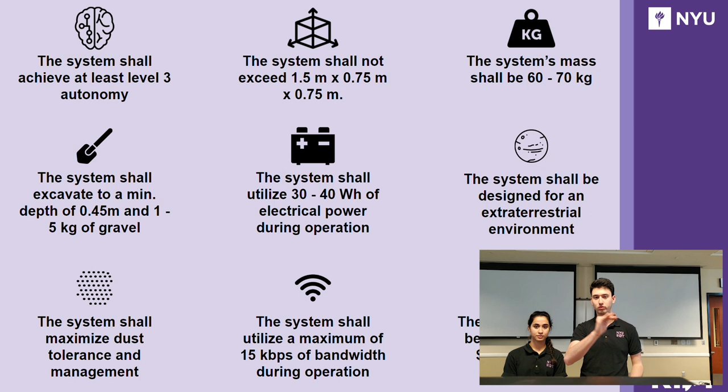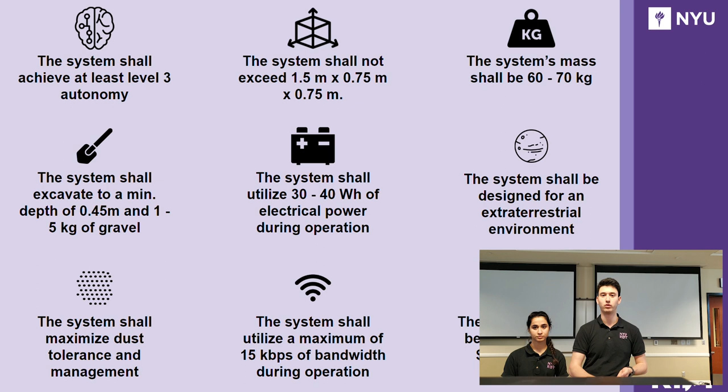We have multiple tiers of performance goals, both for the system and subsystems and individual components, but these are the main 9 performance goals from which the rest were derived. They include achieving at least level 3 autonomy, maintaining within the competition parameters and constraints, utilizing minimal electrical power between 30 and 40 watt hours, minimizing mass between 60 and 70 kilograms, excavating between 1 to 5 kilograms of gravel, and reaching the desired depth to actually get the gravel from beneath the regolith.

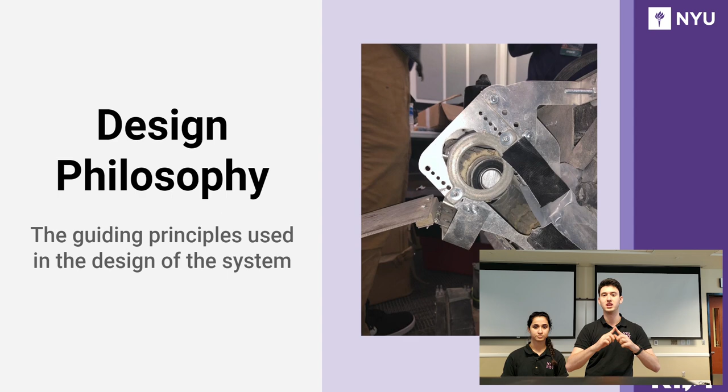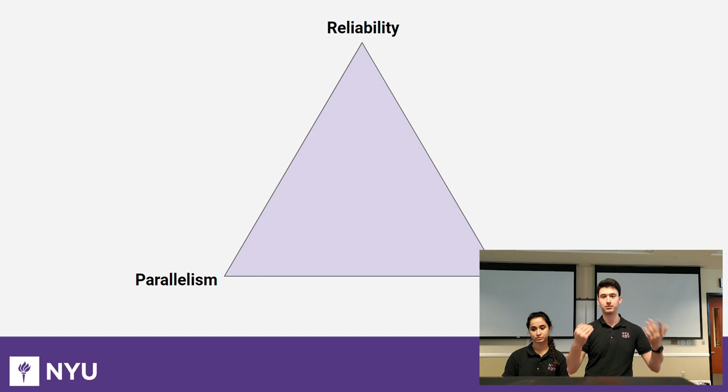Given that horrible event, we created these 3 design principles from which to guide our ideation process. Number 1 is reliability, and supporting that is minimalism and parallelism. So reliability, what does it mean? Well, you don't have AAA on Mars, so the rover needs to operate and operate well.

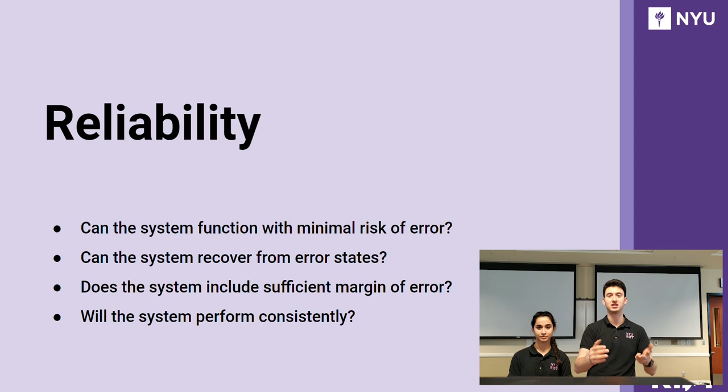It cannot, or should minimize, the amount of error that it sustains. And if it does encounter a fault condition, how can it recover out of it? That involves building the system with a sufficient margin of error, as well as creating a concept of operations that includes these error recovery states and transitions.

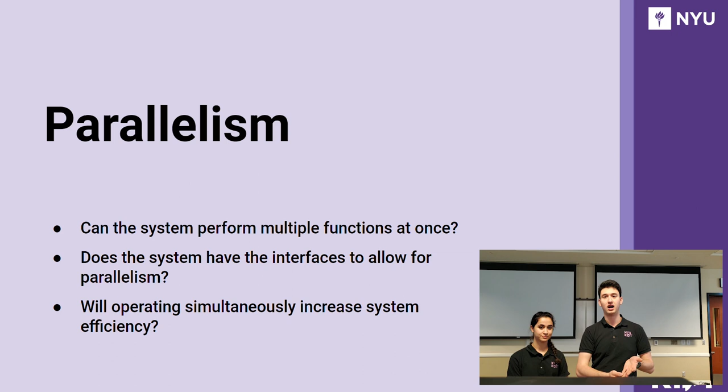Next is parallelism. A lot of time is wasted transitioning between states - digging to deposition, locomotion to digging, etc. So how can we make the system more efficient? We'll have multiple functions occur simultaneously. That's the idea of parallelism. We thought that was really important as a good way to maximize the little time we have, the 10 minutes we have to dig, to be able to get as many runs back and forth as possible and collect as much as possible.

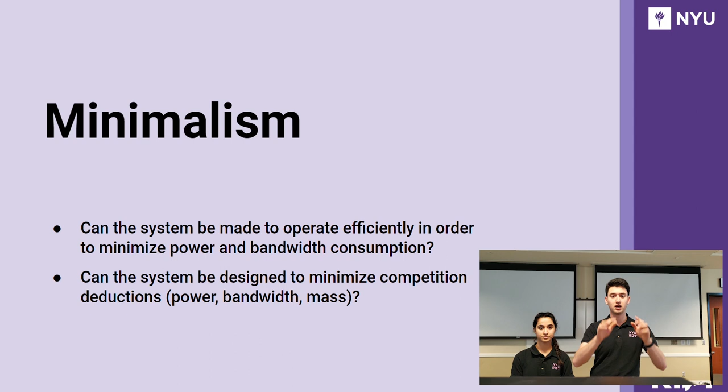And then finally, minimalism. Digging is important, but a big aspect of the scoring system is deductions due to weight, bandwidth, and power consumption. So we want to minimize those. We want to design a robot to use the minimal amount of resources, and we also want to design our concept of operations to minimize those resources as well.

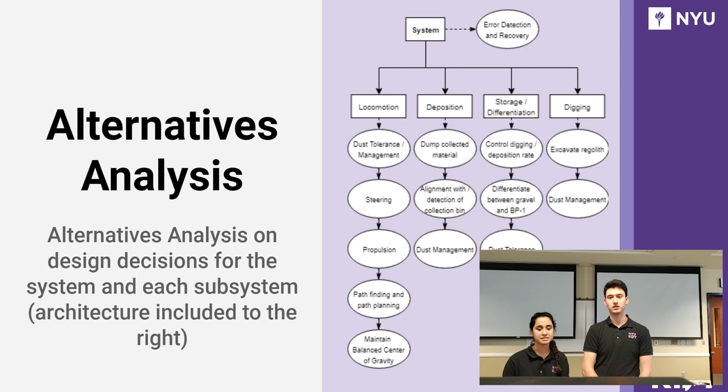Building off the design philosophy, the team used alternative analysis to evaluate each of the design concepts of the 4 subsystems. On the right of the slide, there's 4 subsystems: locomotion, deposition, storage, and digging, and underneath are each of the priorities and functions of the subsystems. The team utilized a 4-tiered process to minimize time and money spent on actually designing and testing the concepts. We first started off by pointing out and declaring our priorities for the subsystem.

Our criteria specification includes what we want our robot to do and how well it will perform. Afterwards, we conducted an open ideation meeting, where everybody from our team engaged with each other to discuss different design concepts that they wanted to use for the subsystem, and we did this without regard to the criteria specification, in order to allow creative juices to flow and a lot of different designs to be implemented.

Afterwards, we conducted theoretical analysis, which is basically hardcore research on each of the design concepts that we came up with in the open ideation process, and we wanted to see which design idea was best fit for that subsystem. Afterwards, we did practical analysis, which is basically prototyping the few that were left over from theoretical analysis to see which one actually was best fit for the system.

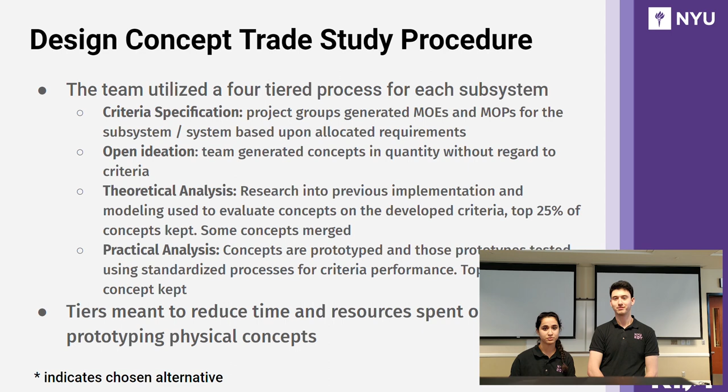So for the digging system, we tested the conveyor belt digger, the auger, and the digging wheel. Out of those three, we chose the digging wheel because of prior experience and low power consumption. It is more complex, however, because of our prior experience, we were able to overcome those obstacles. And last but not least, it's very reliable.

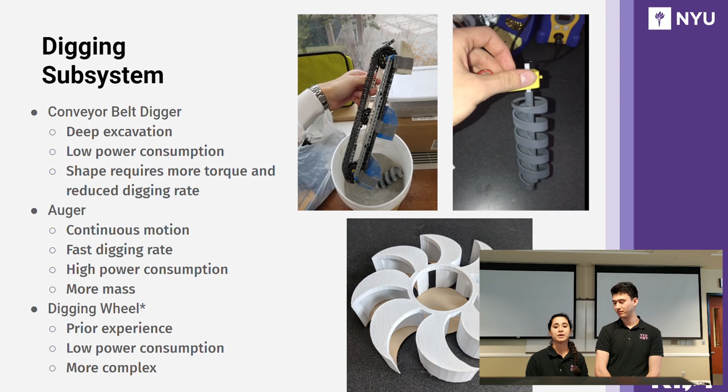For the locomotion subsystem, we tested two prototypes, the rocker bogie and the static frame. We went with the static frame because it's a continuous frame and it offers reliable mounting points as well as structural integrity. It also has a low mass and a low complex build. However, it doesn't offer any suspension because it is a static frame, so the risk of collision with field obstacles is high. However, to mitigate that, we chose to increase our wheel diameter to go over any bumps in the arena.

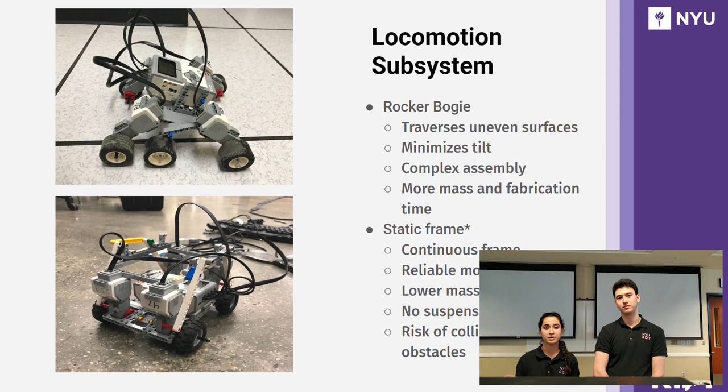For the deposition subsystem, we tested three prototypes: the expanding bin, the chute, and the tipping. We went with the tipping because it's the most simple system out of the three. It requires little energy. However, it's not as good at keeping the dust to a minimum because it is an open system. However, to avoid any problems with the system breaking because of the dust, we made sure that a filtration system was implemented into our storage.

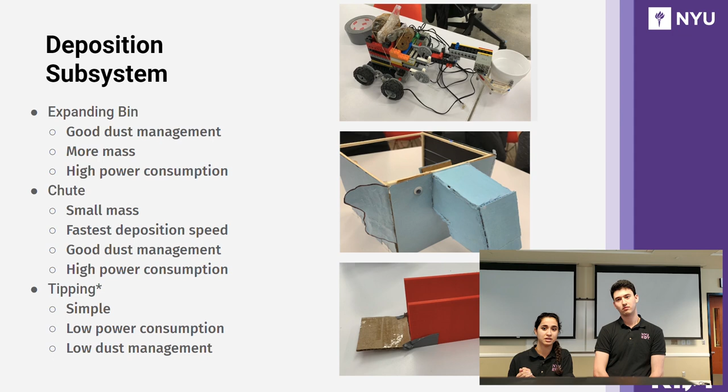And finally, last but not least, the storage and differentiation system. We tested a vibrating sieve and a tiered inclined plane system. We decided to go with the tiered inclined plane system because of its greater inflow rate from digging and its little to no power consumption.

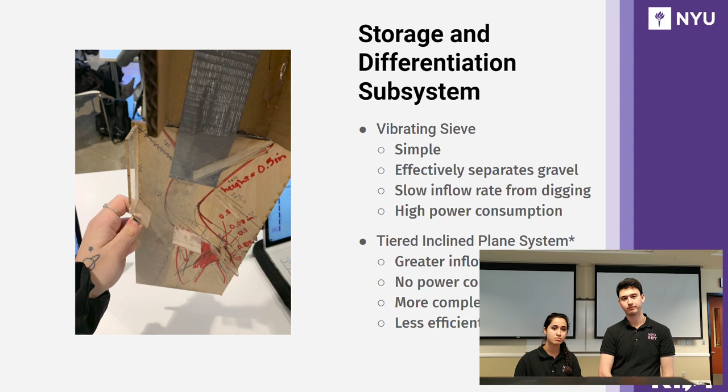For the completed system, the team kind of went back and forth between using one robot or a 1.5 robot system. The one robot system would consist of just one rover responsible for depositing, digging, and moving. But to increase time efficiency, the 1.5 robot is a dual robot system so that one robot is purely for locomotion, moving, and deposition, while the other one is just for digging. So while the digging drum is digging, the other robot is depositing its gravel into the collection bin.

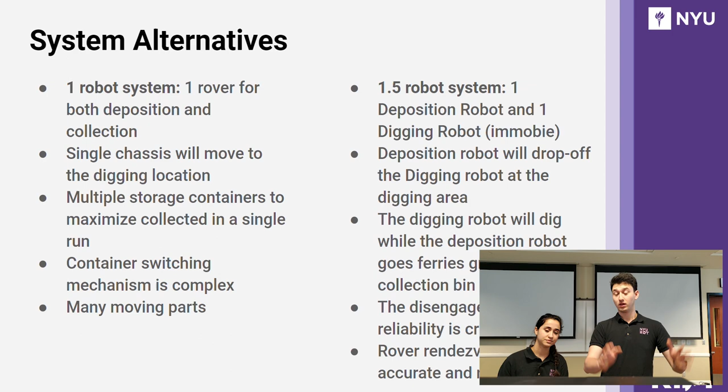So we've passed the preliminary design phase. We have these concepts that we're going to bring forward into the actual implementation system. So how do we do it?

So we have 4 real stages of our implementation and methodology, derived from the system engineering process our team implemented. Number 1, preliminary design. We conducted an alternatives analysis based upon requirements and performance goals that we defined earlier on. Then we moved into final design, where we took those concepts and fleshed them out. That means CAD, state models, schematics, and high fidelity prototypes. Then we moved on to fabrication.

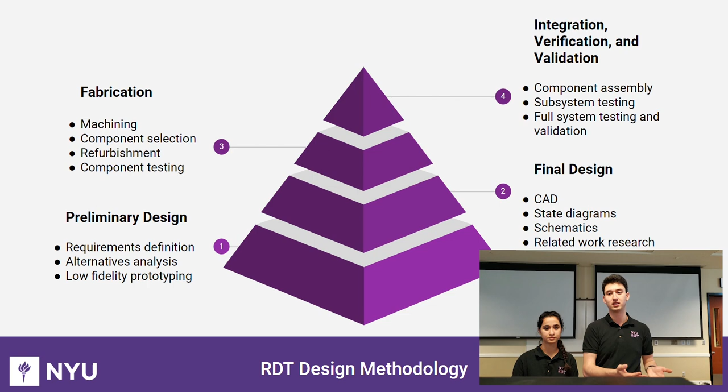We did a variety of machining methods, both manual and automatic, computer aided. Then we chose the components. Some components are reused from previous years, so we refurbished them. We tested each component to make sure that each thing worked individually. Then we integrated the system into its individual subsystems, and then the larger system. We tested each thing along the way to make sure they met the various requirements set for that level of complexity. Then we tested the full system in simulated competition environment and conditions, which we'll talk about later.

This is kind of a summary of the final design phase. These are the CAD models.

I just want to point out, we keep saying this word tiered inclined plane, and unfortunately that's not something we can demonstrate, so I just want to quickly point out how it works. That's the image all the way to the right. The regolith enters from the top, the mixture, because there are several layers of ramps, inclined planes. The first one is a sieve. The momentum of the fluidic regolith allows the regolith to fall through that sieve and exit through the rear, while the gravel just rolls down to the bottom. Another change that we did during the final design phase was change the deposition mechanism from tipping to a pushing mechanism.

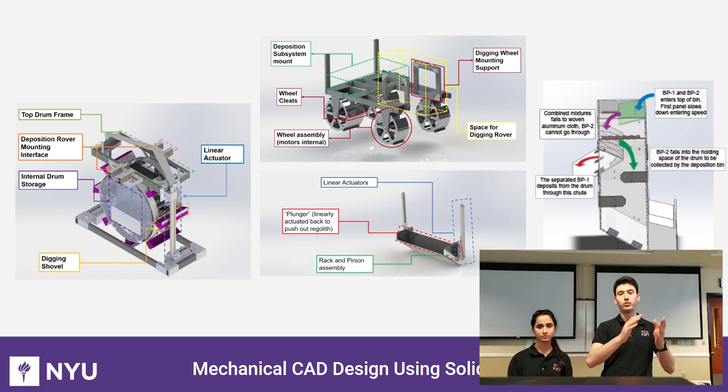That's because the tipping mechanism just did not dimensionally fit with the second rover. It was just too complex, and in order to maintain our design philosophy of reliability and parallelism, we changed the deposition mechanism. This is an example of our fabrication. We use a combination of CNC automatic milling and hand machining. Our integration of the final subsystem and system was mainly manual assembly.

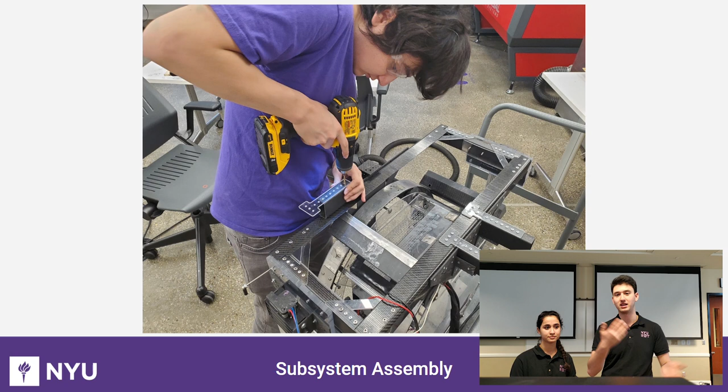So to verify and validate the whole system, the team took certain steps to ensure that each component adhered to its functional goal.

To verify the system's mass, we individually measured each component. It measured out to be 69 kilograms.

To test out the autonomy of the system, we did this through computed models, and then afterwards we ran it through simulated errors to test how well it came back from those errors.

To verify the system's ability to deposit at least 1 kilogram of gravel, we tested each component that would be responsible for collecting that gravel, like the digging wheel, how well would it dig, how well would it hold the gravel, and how well it can measure how much gravel is in the storage bin.

And last but not least, to verify the system's ability to perform multiple tasks simultaneously, we performed the tasks separately first, and then after it did it well, we did it together as a whole system.

To validate the completed system, we tested it at a beach because we did not have the facilities to make a competition arena in our school. So we went to the beach and tested it there. Sand shares many similar qualities to regolith, so we decided to dig up some sand and put some gravel at a required depth to see how well the robot dug. This testing actually occurred several times throughout the month of April to ensure that the system fulfilled all of the technical requirements it had to for the competition.

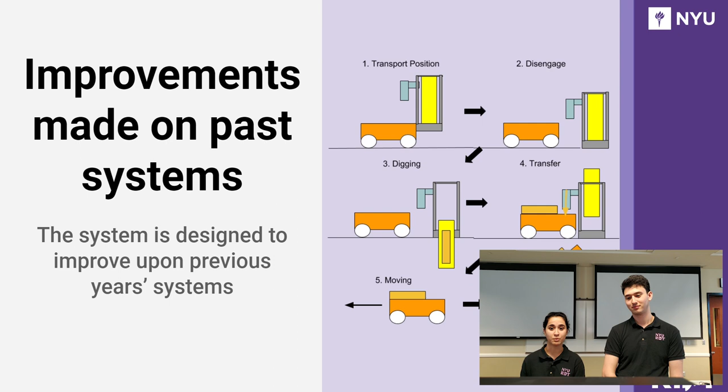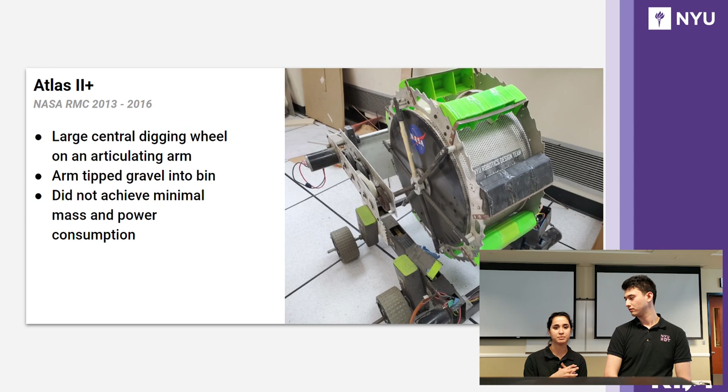System innovation. NYU has been doing this competition for 7 years, so we've obviously learned a couple of things along the way. Our first robot in 2013 was Atlas 2, and as you see, it's a very basic design. It features a large central digging wheel on an articulating arm that collects the gravel and then deposits it into the collection bin. It was successful, however it wasn't successful in the means that it didn't achieve minimal power consumption and mass.

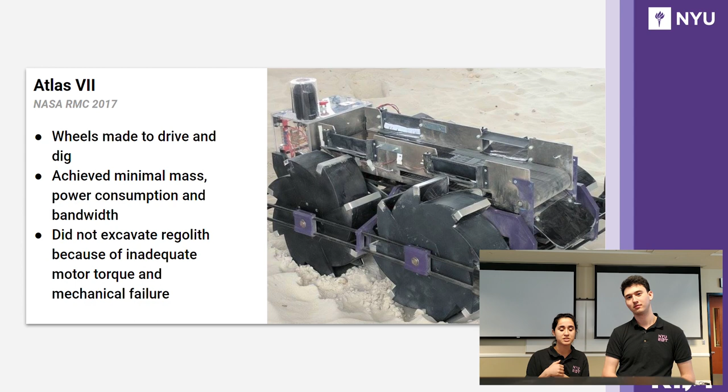Afterwards, in 2017, we really wanted to achieve that minimal mass and power consumption, so that's what we focused on, as you see in this design. However, it didn't excavate much gravel because of the torque and mechanical failure. However, the team's creativity was really illuminated by the wheels. It wasn't only made to drive, it was also made to dig because of the shovels.

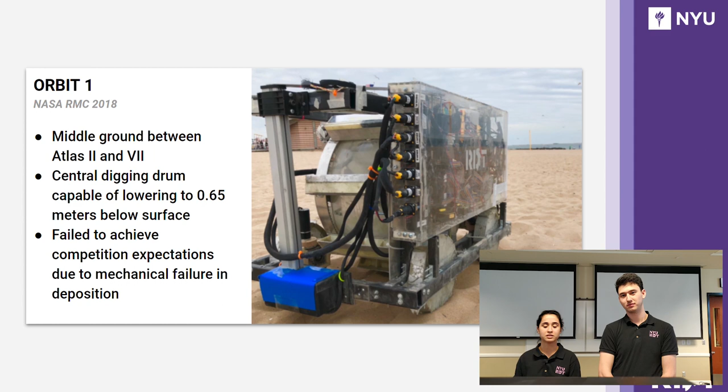So if you look at Orbit 1, it's kind of like the love child between the two robots. It features the same central digging wheel as Atlas 2, as well as the same conveyor belt as Atlas 7. However, this robot is now able to lower to at least 0.65 meters below the surface to get an even deeper excavation. It was great up until the mechanical failure in deposition, as Teddy said before.

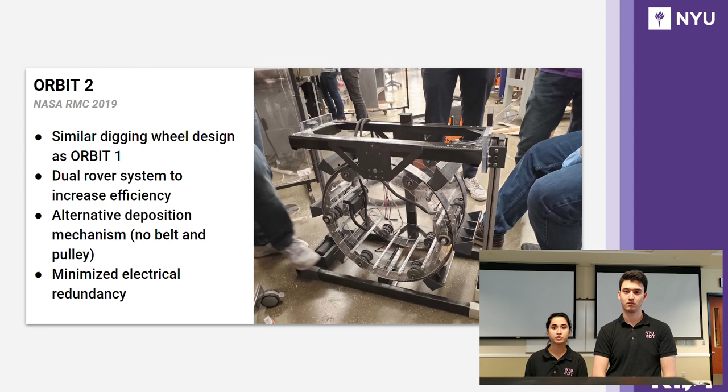So this year's robot, Orbit 2, is basically the same design concept as Orbit 1. However, now it's a dual rover system to increase time efficiency. And instead of the conveyor belt system for deposition, we're now using a tipping bin.

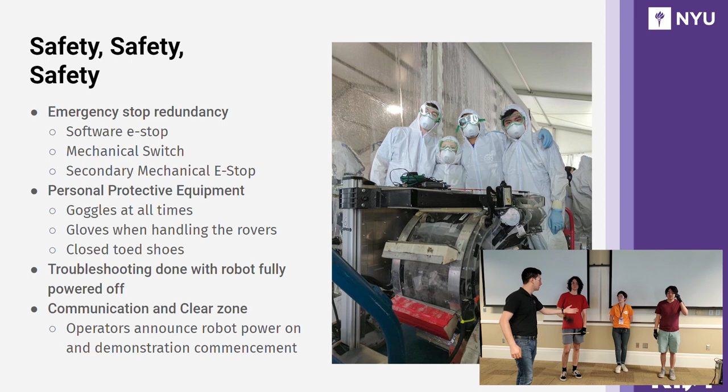Okay, so next, the demonstration. We're going to move aside. I'm going to grab my PPE and put on my goggles. The camera's going to move now. I'm going to have three new members on our team helping: Michael Linares, Kirsten Page, and Gian Fairchild.

So we're going to be paying careful attention to safety. We're going to be calling out all of our intentions, only approaching the rover when it's powered down. We also have Dan Schaffman operating the operator console over there, and he also will be communicating. We have multiple ways of e-stopping the rover: two e-stop switches for redundancy, as well as a software e-stop in case of disconnection or error for remote shutdown. I'm wearing goggles.

We're all wearing goggles. Gian and Michael will be handling the rover, hence they're also wearing gloves and correct closed-toed shoes - no sandals here. Michael also is carrying the stick, to turn off the rover in case of an error, from afar, so we don't have to approach it too closely. We're not allowed to mark the floors, so there are no markings of the clear zone. However, each square is a foot, so we can judge how far we need to step back from that.

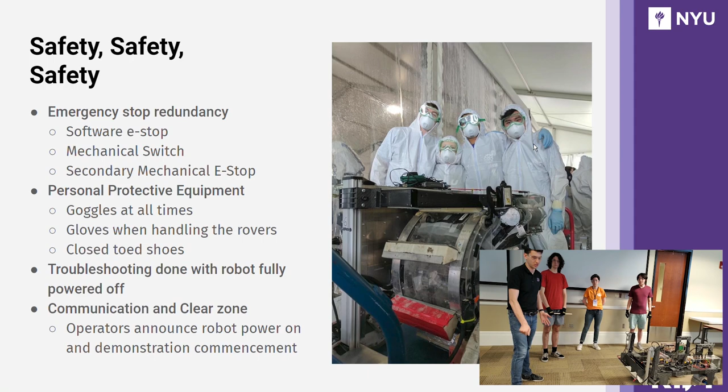So now we're going to first demonstrate locomotion. By the way our rover is set up, we actually cannot prop it up on anything - it's impossible. We did receive permission to run on this floor, so we will take an extra clear zone while it is running briefly, to ensure that we don't have our toes run over or anything. So let's start the demonstration. I'm going to step aside and narrate it.

All right, I'm going to turn on the robot. Turning robot on. Robot is on. Clear. Okay, so now we're going to move the rover, actually in the backwards direction first for about 1 second. So whenever you're ready, Dan. Moving robot in 3, 2, 1.

So that's the rover. It's a little bumpy just because of the cleats on the wheels. Okay, I'm going to turn off the robot. Safe to approach. Turning off the robot. Robot off. So now the rover's off.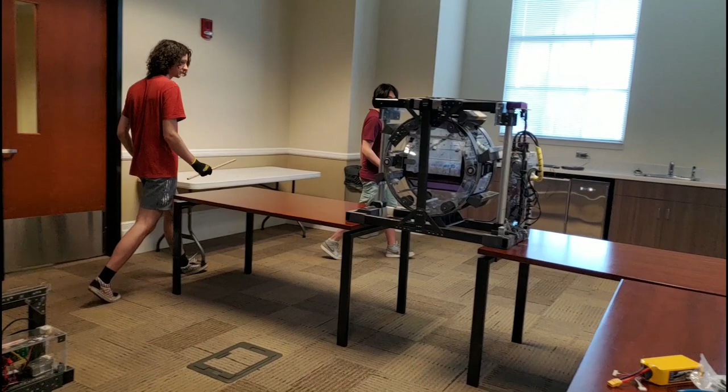We're going to pan here to our digging rover. Again, we have Gian and Michael operating it. I want to point out a couple things. This is not attached, but we have many means of feedback on the rover, such as the linear potentiometer, which measures drum height. We have a weight sensor inside, as well as an infrared sensor to measure the volume of the regolith collected, as well as limit switches up the wazoo.

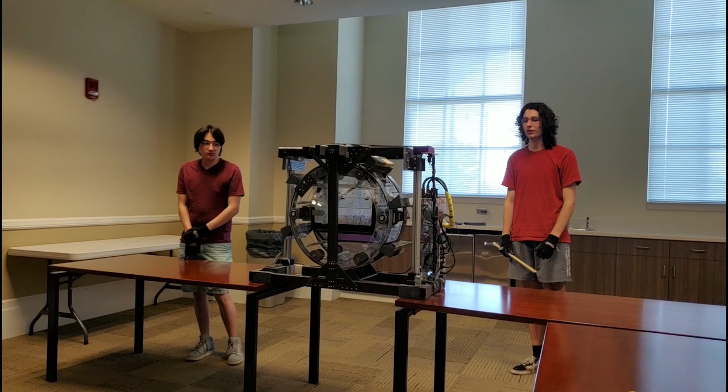Okay, so we're going to now run the drum. I'm going to turn on the digging robot. Turning on the digging robot. The digging robot is on. Clear. Running drums in 3, 2, 1. So the drums, the shovels will rotate around it in order to dig.

Now we're going to show how it lowers down into the surface as it digs. Engaging linear actuators in 3, 2, 1. So ideally that would lower as it digs to get deeper into the surface.

And then when it's done, it's going to raise back up. Engaging linear actuators in 3, 2, 1. Okay, bring it up slowly. It's doing this autonomously, so it's learned not to mess around, waiting for the limit switches.

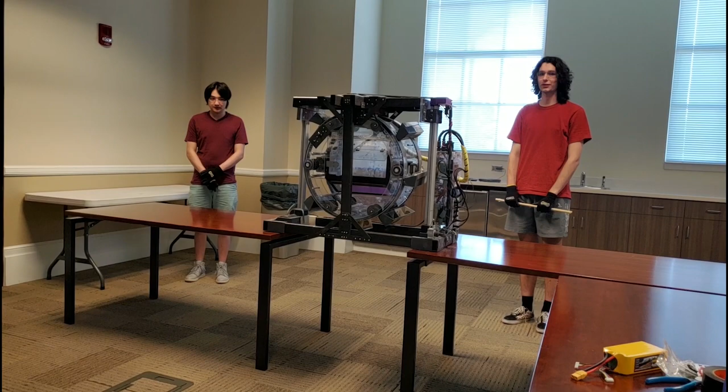Okay, so we're ready to turn off the rover. Can I turn off the digging rover? Safe to approach. Turning off the digging robot. Digging robot is off. Okay, so now I'm going to have Michael and Gian.

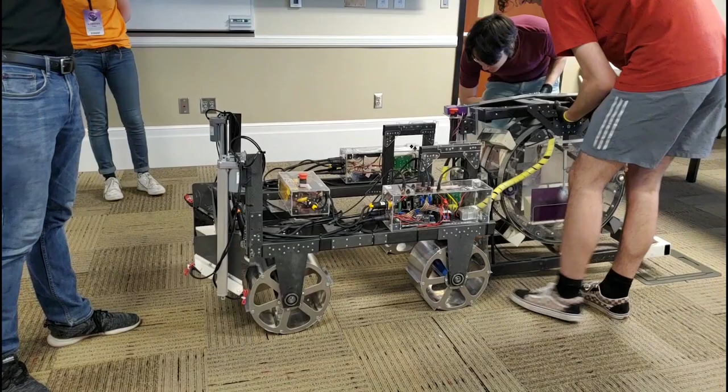We're going to demonstrate now the engagement of the two rovers together. The rover only weighs about 38 kilograms, hence why we only have two individuals that are needed.

Can we make sure the wire? You don't have to. That's why we only have two people carrying it. It is a bit human intensive to put it in, but they do not come back together automatically. They never come back together once the robot is operational. Can we fix the wire, Michael?

Thank you. Okay, so when to engage, the linear actuator will go down, and these forks will rest on this lift here, and it will be lifted up off of the ground. Okay, let's do that.

Can I turn the robot on? Safe to approach. Robot is on. Clear. Clear. So now he will bring the linear actuators down and lift the robot off of the ground. Go ahead. Engaging linear actuators in 3, 2, 1. All right, so we can get the camera underneath so we can see that it's off the ground there.

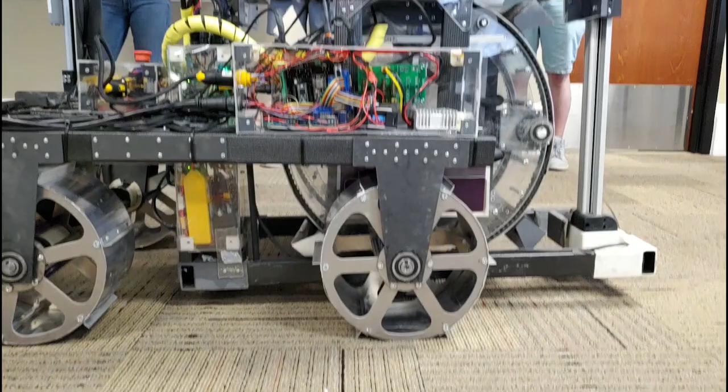Yep, don't go too close. It's still on. Okay, still within the clear zone. It's off the ground. And in this configuration the rover will drive from the starting position to the mining area. Okay, thank you. Now we're going to disengage the rover.

That involves raising the linear actuators such that the rover now lays on the ground. Okay, Dan, whenever. Engaging linear actuators in 3, 2, 1. So it's almost there. All right, so now it is off.

Okay, we're going to turn the rover off, we're going to disengage the two rovers, and then we're going to finish up with the demonstration deposition. I'm going to turn the robot off. Safe to approach. Robot is off. Okay, so now the robot is off, we're going to pull out, Michael and Gian are going to pull out the deposition rover.

So now they're disengaged and this would drive away. Finally, just to demonstrate the deposition mechanism, how it is this plate here will move up to push out the regolith.

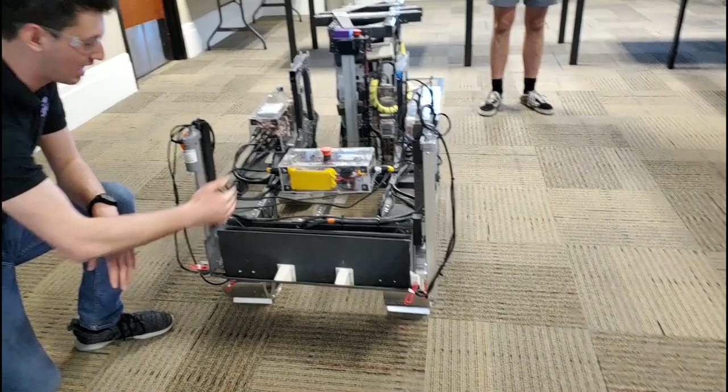And then move back down to accept more regolith. And then this entire assembly moves down to get the regolith from the drum, and then we'll move up to push it into the collection bin.

Okay? So Dan, oh wait, we gotta turn it on, though. All right, I'm going to turn on the robot. Safe to approach. All right, turning on the robot. Robot is on. Clear. Clear? Engaging linear actuators in 3, 2, 1.

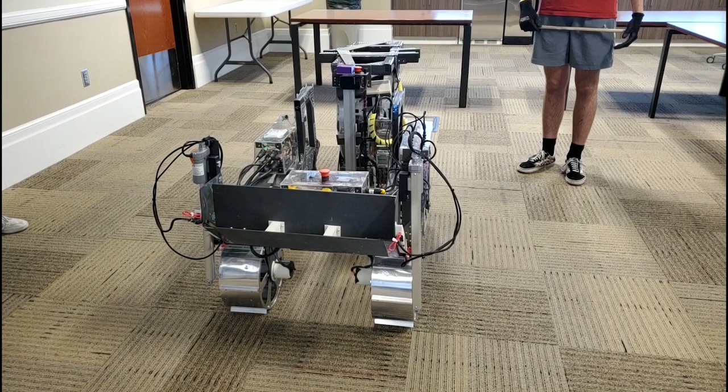All right, we're going to turn off the rover. I'm going to turn off the robot. Safe to approach. Turning off the robot. And then the robot is powered down.

That concludes the technical demonstration and presentation for the 2020 NASA Virtual Robotic Mining Competition. I know we ran a little long, sorry about that. And yes, thank you for joining us. We've been at NYU Tandon School of Engineering. Thank you.